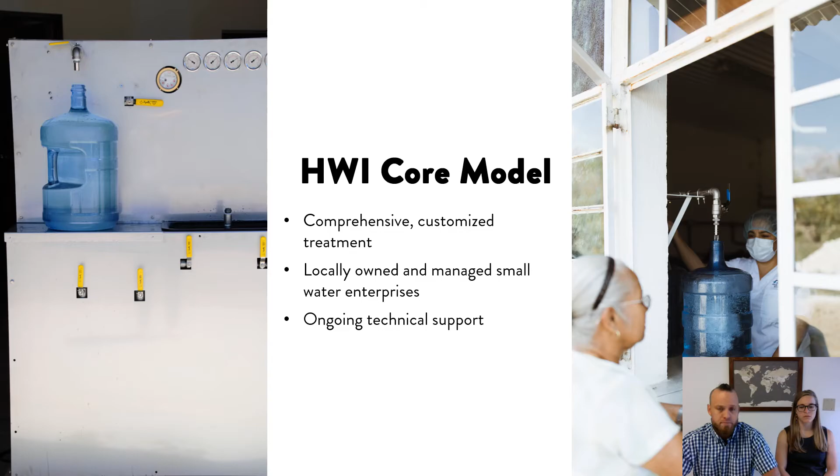And we were using these mostly to address microbiological contamination in surface water people were drinking all over the world, but UF doesn't address minerals, metals, or salts.

One thing we quickly identified in Haiti was that most of the need and opportunity for impact was in coastal communities where the groundwater was brackish. Therefore, our ultrafiltration-based equipment wouldn't be an appropriate fit.

Developing safe water solutions for places like Onsite actually dovetailed very nicely with a broader trend in the evolution of Healing Waters' mission.

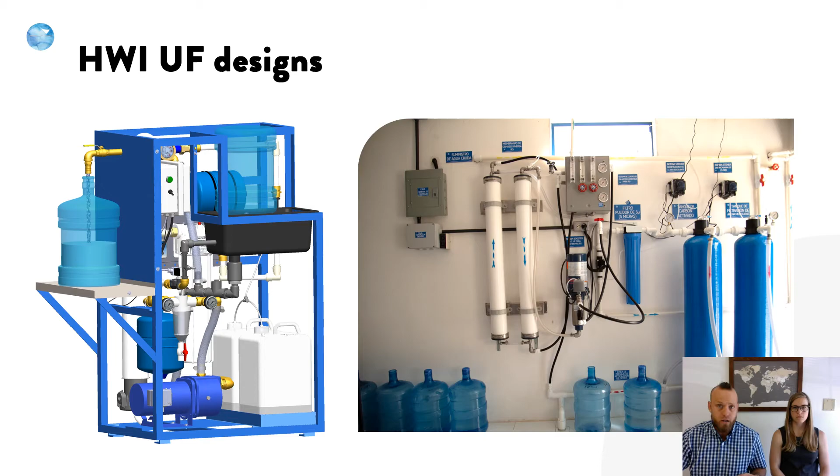What I'm referring to is we started seeing a significant and undermet need for a niche implementer to serve partners within the sector and contribute to broader interventions by bringing a focus on sustainable treatment solutions for challenging water profiles, even in low-resource contexts.

We started understanding the global trends and forms of water access marginalization that I introduced a few minutes ago, and we started seeing the uneven distribution of nonprofit and grant-funded water interventions going to regions where groundwater is low enough in TDS and free of glaring physiochemical contaminants that borehole water can be made potable with basic filtration and disinfection, and how this leaves regions where water quality poses the greatest threat to health underserved.

As an aside, exotic contaminants often are present but untested for in groundwaters where the WASH sector does implement boreholes with only chlorination. And that sheds light on the need for more scrutinous testing to ensure compliance with SDG standards and what we call safe drinking water.

So, seeing this, we started actively looking for opportunities to partner and bring sustainable treatment and remediation solutions to regions where this presents both a challenge and a desperate need.

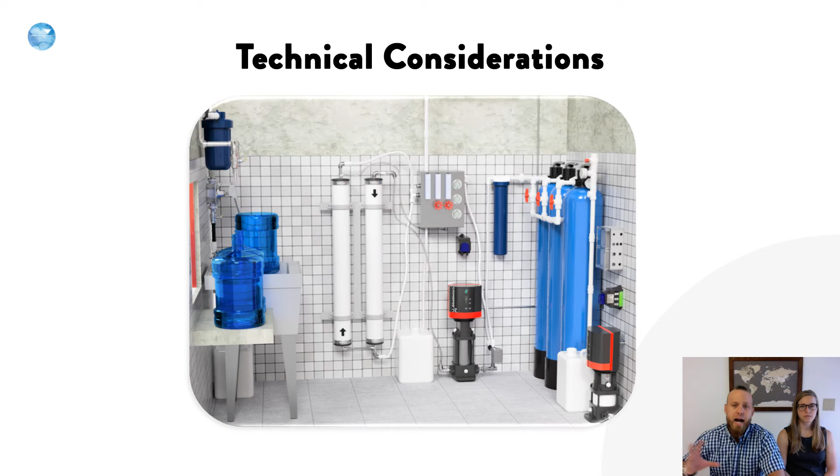First, we've designed a system where the pumps required to drive the water at high pressures can be powered directly by solar panels, using what we call flex, or variable voltage pumps, that can operate on DC, direct current. And while this does constrain systems to operating only during sunny daylight hours, it eliminates the burden of the batteries and inverters that are typical to solar energy systems for pumps. That in turn drastically decreases future replacement costs and improves the sustainability of the system.

And then we address that operating time frame constraint by ensuring a cushion of treated water storage with gravity feed.

Secondly, we've learned that it is of critical importance to build out water systems by mounting components on a wall or situating them across the floor, each in their place to form an intuitive treatment train, as opposed to having the system sort of condensed or compressed into a skid mount or a packaged assembly or a box, because then it can become a black box.

It's absolutely key that operators are able to see and access each component in order to understand, monitor, and ultimately maintain them. This way, operators can actually pinpoint the failure and determine needs for replacement parts and change things out such that the system itself never reaches the end of its useful life altogether. In contrast, we've seen that if a system is too self-contained, local operators can write the whole thing off as broken when just one internal failure occurs that should be easy to fix if it were intuitively accessible.

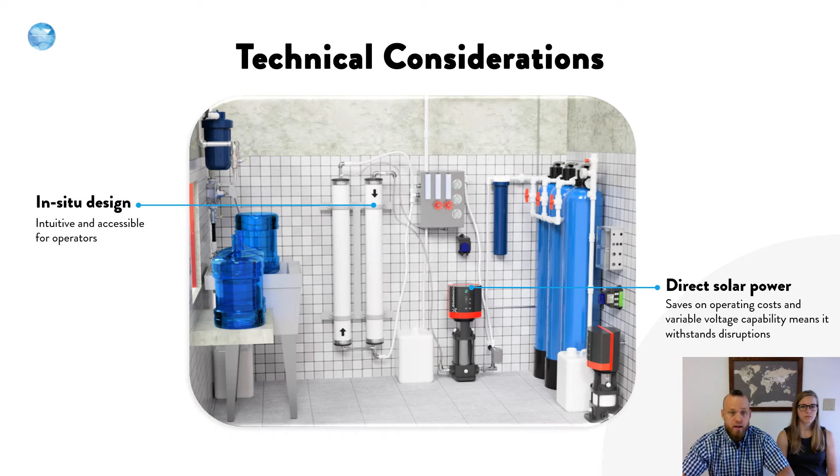Finally, the third adaptation is that Healing Water's reverse osmosis builds are, to our knowledge, unique to the sector so far in how they employ custom-built hydraulic controls to optimize between feed pressure, TDS removal, recovery rate, and blending. Now, these controls would be typical, they would be standard in a municipal scale RO plant. They're standard technology. But their novel use in this context, in a community context, permits feasible operations even at such a rural scale.

This is really critical in situations where power and therefore pressure are limited, and also where the water source is scarce. For example, if the discharge of the well being used is a limiting factor in production capacity to serve the whole community, control boxes allow us to push the envelope. They let an operator tweak and optimize under all the constraints to get a viable result.

And these designs typically use series recirculation to get recovery rates as high as 74% while producing effluent TDS at around an ideal 50 milligrams per liter.

Okay, but all that said, contextualizing the technology is only half the battle, maybe less than half. The other factor is something we've learned over the years through trial and error. We've learned that culturally contextualized and extensive management training is absolutely critical for community projects to remain active long term.

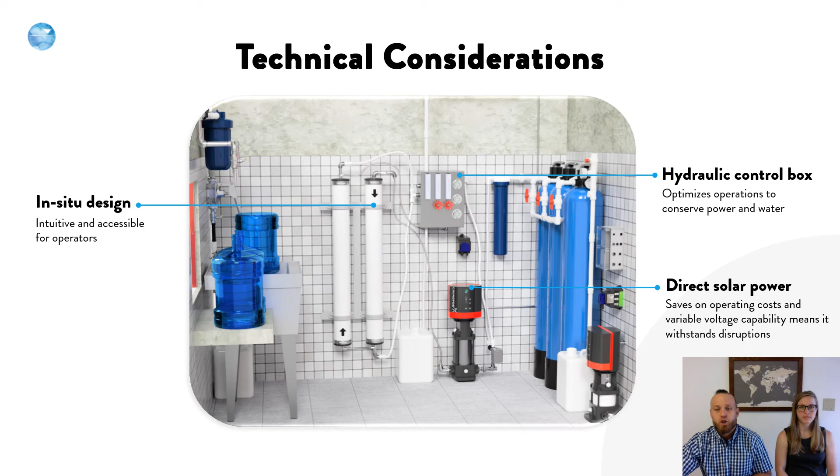This is where I'd like to introduce my colleague Hannah Loki, who serves as our senior program manager, to discuss training and empowerment as well as measurable results. So Hannah?

Our team in Haiti approaches each intervention by first working to ensure commitment at the local leadership level, and then thoroughly training designated community members in hygienic operation as well as routine maintenance and troubleshooting of the water system. They engage these future operators in installing the equipment initially over the course of 3 days to deepen their awareness of the process and components.

Then, our staff continues to offer regular support through in-person visits to reinforce training, resolve any advanced issues, or assist in sourcing replacements. Because these visits are at no cost to the community, there is incentive to report any concerns rather than ignore red flags. These visits start at a minimum of quarterly and then taper down over 5 years as the local leadership gets more experience under their belt.

One unusual thing about Onsite is that all of these training visits, and even bringing construction materials and equipment for installation, had to be done by boat. Our Haiti team has made a lot of boat rides from the nearest marina in Valence. So the big question is, does this approach really work? Can these interventions survive and sustain themselves long term?

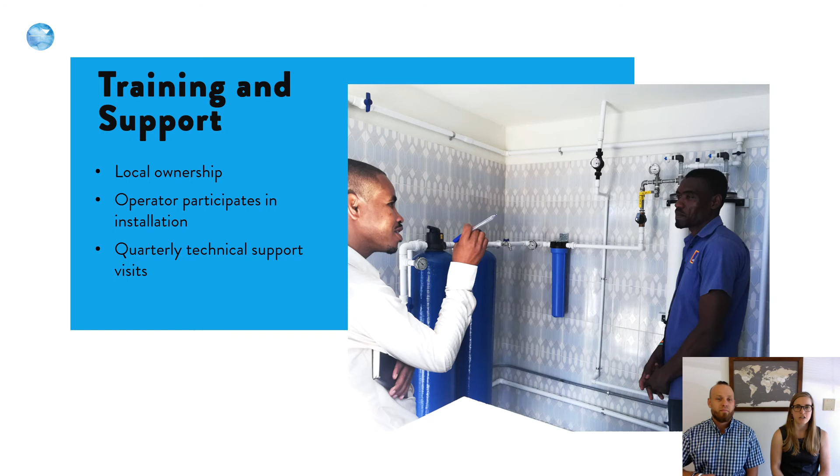Well, nothing is perfect, and we're still learning, but the performance of these interventions in coastal Haiti that we're mentioning would indicate the answer is yes. 100% of these water projects implemented since adopting the approach are still operating.

Across 15 projects Healing Waters has implemented in Haiti requiring RO treatment for brackish water, our staff have collected 86 quarterly monitoring reports showing key performance indicators. Of these quarterly reports, 78% show projects are setting aside their planned savings quantity for future replacements. The average uptime of projects is 93% of the quarter.

These projects are serving communities as small as 500 people and as large as 3,000 people. All product water from Healing Water Systems meets WHO standards and Haiti national water quality standards. So the data illustrates that powerful treatment systems can be managed sustainably by low-resource communities.

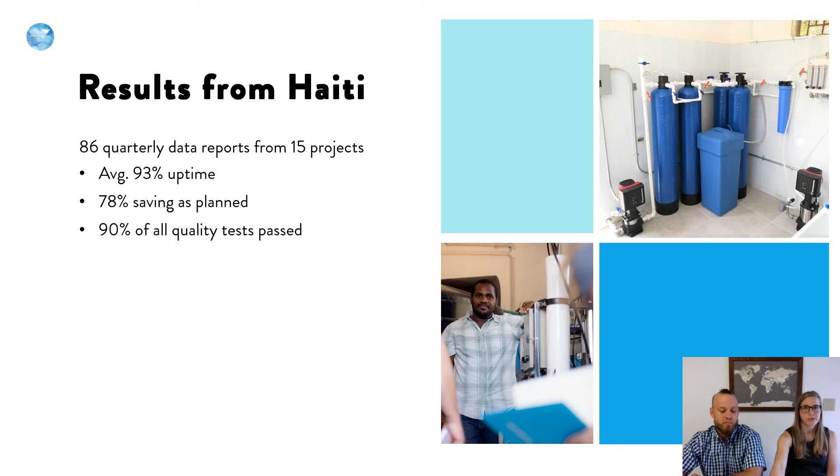Now I'm sure you're wondering about the results from Anse-a-Boeuf specifically. The kiosk at Anse-a-Boeuf sells about 1,000 jugs of water a month, serving 374 people. That volume is more than enough needed to cover the operational costs and save for future maintenance.

Over the 9 quarters we've collected monitoring data for, only 1 quarter did the project not put aside the full savings as planned. In fall 2020, Hurricane Laura hit the site, causing some water damage to a pump. Nevertheless, the operator contacted Healing Waters technicians who were able to assist in repairing the pump, and the project has been up and running again.

Amazingly, because the water system has run so cost efficiently and been so light on maintenance and repair burdens, the community has been able to reinvest a surplus of the project revenue from those affordable monthly contributions and actually built a simple sanitary block that constitutes improved sanitation for the very first time in this community. What a poignant example of how empowerment and a sustainable enterprise can snowball.

Recently, our Haiti country director, Wesley Hippolyte, mentioned to us an anecdote that made his day. Normally, whenever our field staff get a phone call from site partners, it's because there's a troubleshooting issue, which is fine, we're there to help and we're glad that they're reaching out. So when he saw a call coming in from Anse-a-Boeuf, he thought another boat trip was forthcoming.

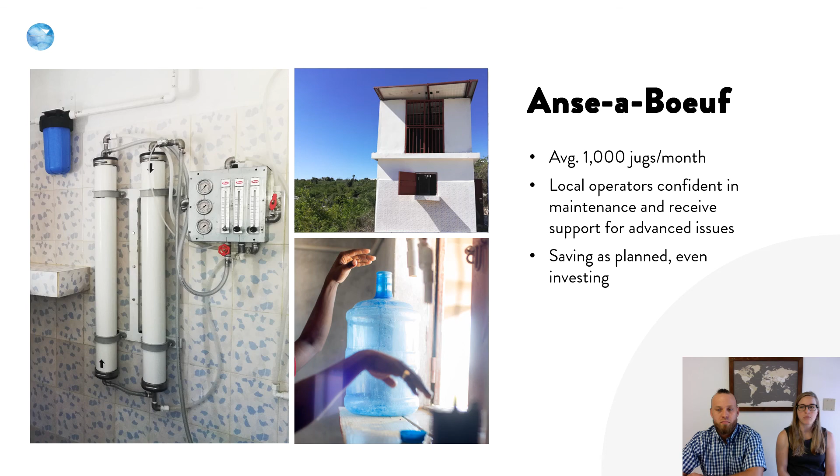So our finding is that subsidies and ongoing tech support may be appropriate and equitable as part of bringing clean water to all. In our experience, this support at no cost to the community has been key in maintaining viable safe water service and avoids the starts and stops that can be the downfall of safe water interventions. We don't believe this contradicts the principle of self-sustainability. We think the sector needs to reassess what it means for a project to be self-sustainable to ensure undue burden isn't being placed on the most marginalized populations.

Okay, let's summarize the conclusions and takeaways we want to leave you with. Salinity and exotic contaminants in water supplies of marginalized populations are on the rise. Certifying water quality, in addition to supplying access, becomes more vital than ever to ensure health and safety for all communities. Prevalent exotic contaminants, often not tested for, should not be overlooked in the rush to consider populations served with improved water access.

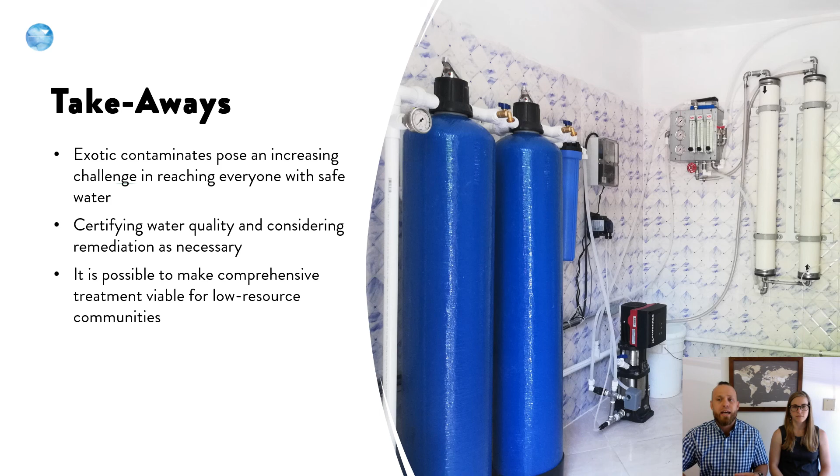It is challenging, but possible, to bring robust treatment for salinity and chemicals or metal contamination to marginalized and remote populations in a way that is affordable and sustainable. Communities like Anse-a-Boeuf can be empowered to manage complex water treatment systems even where literacy and tech experience are limited, as long as training and ongoing support are properly managed.